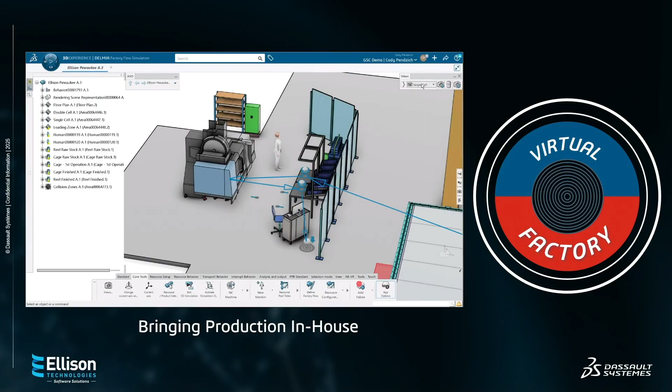Just a simple scenario we'll talk about a lot more, but in this particular scenario, we had a single 3-axis mill that came with this facility. We wanted to add in some additional machining capabilities. Now, in order to add those machines in, what wasn't shown in this is that whole back wall is all office windows into the office space along the corners there.

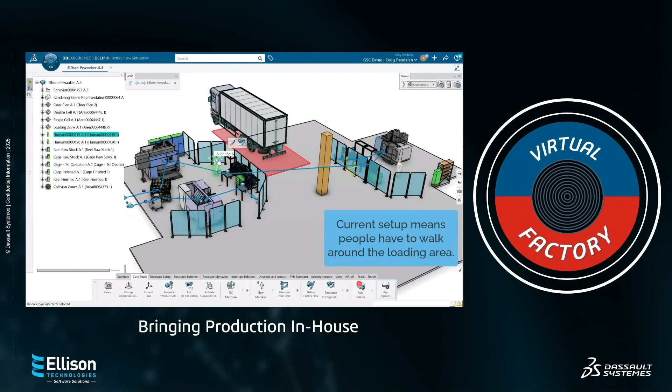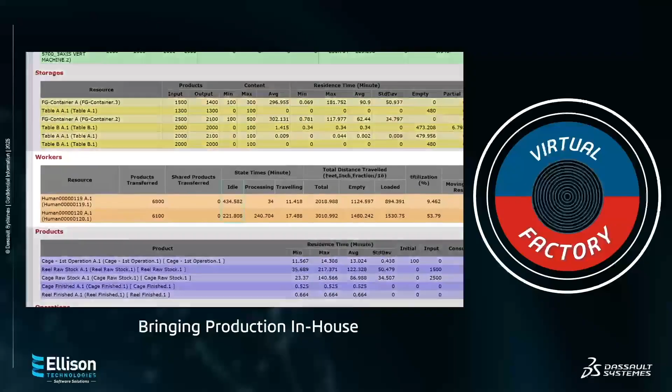So they couldn't put the machines in the corners. The only real place they could do it was on the opposite side. Well, now they have workers split out between 2 cells for a very simple process. And as well as that, what we have going on from there is essentially someone walking through a loading zone over and over again throughout the day — a little bit more of a risk as well.

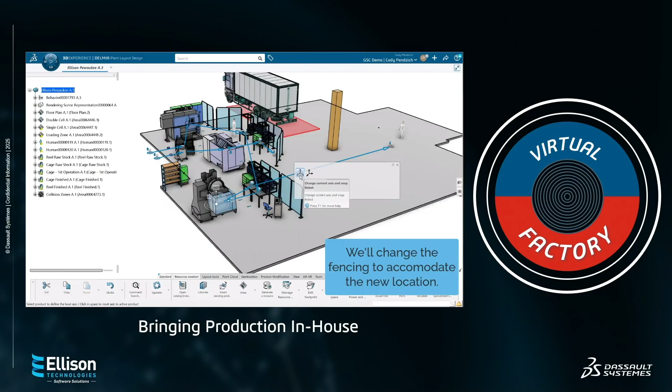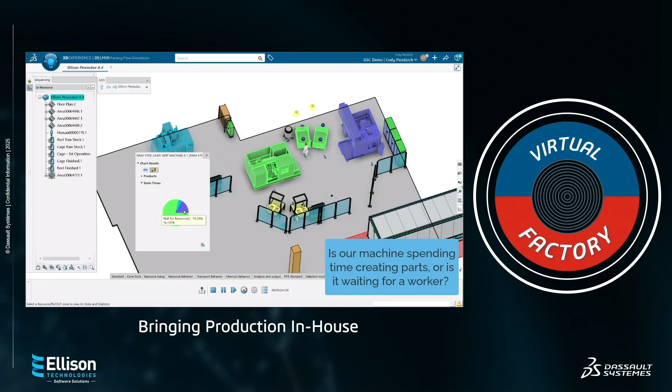Now what they're considering is I can take this facility, I can take this cell, I can move it over to the other side, and then what happens from there? Am I going to be able to stay on top of part production? Are we going to be able to keep that going? Well, I can move a few things around and then we can actually test out the scenario. So I can take it to that next level, and in this case what we decided to do is check if we put all three of those cells together, can we have one operator keep all three machines running and keep parts moving, and then maybe we can reassign that second operator that was working the one machine to something else, or maybe have them move around a little bit more during the day between different cells.

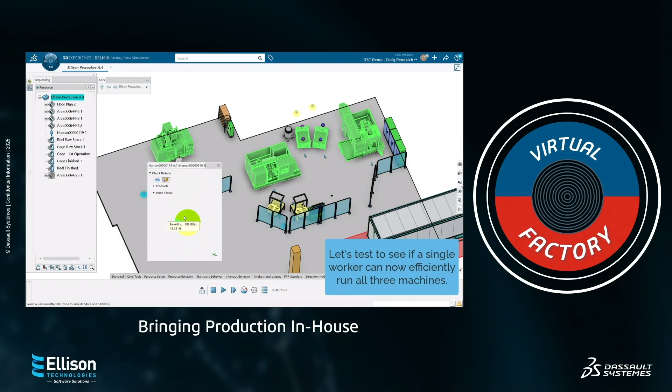As this simulation is running, the system is giving me data and measurements. How long did it take for a part to get from point A to point B? How much time did this machine spend waiting for a part? Potentially a worker to offload a part. All those different factors and variables, and everything's broken out into reports that we can then take and analyze.

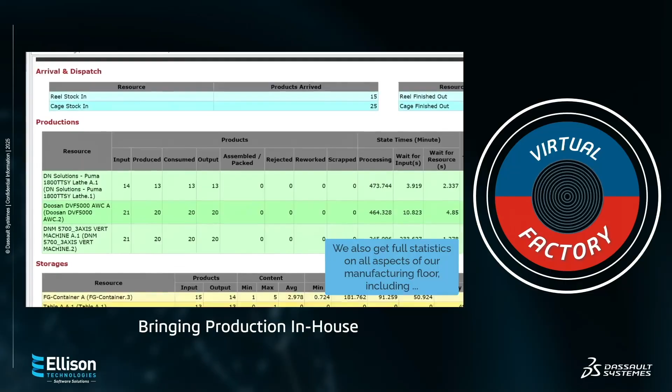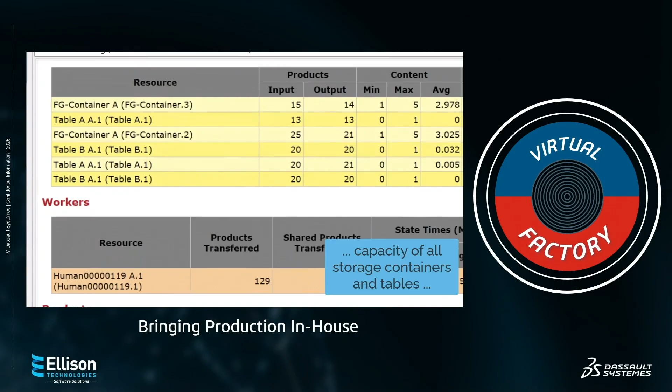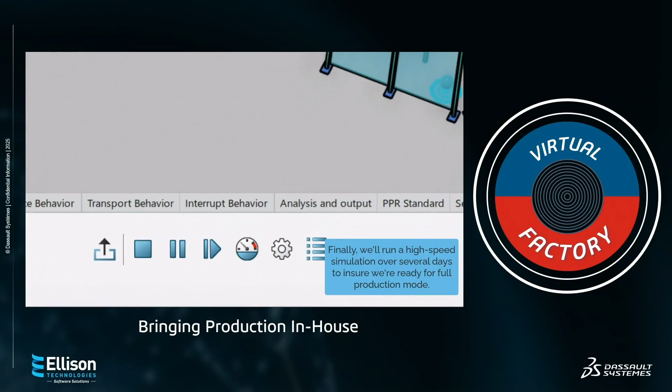That is Virtual Factory. Let's take and test out the scenarios, test out the ideas that we have before we execute. I talk to a lot of companies about their factory layouts and new equipment purchases, all of those types of things.

Ellison is a distributor of DN machines, DN Solutions machines. As a result of that, we get to talk to a lot of companies who are bringing in new equipment, ask them how they're doing it, ask them how it's working today.

And one of the things that I hear really often is that we don't really bring in new equipment all that often. We try to avoid it because it just means we have to go through all of this. Or we'll hear things like, I've been trying to get a new machine like this in for years, but we just can't prove out the value. We can't show that it's actually going to be worth it for us.

So that's where a tool like Virtual Factory comes into play. Now, Virtual Factory is broken out into two pieces. I've spent most of my time talking up here so far about Factory Sim, but the plant layout side of it is very important as well.

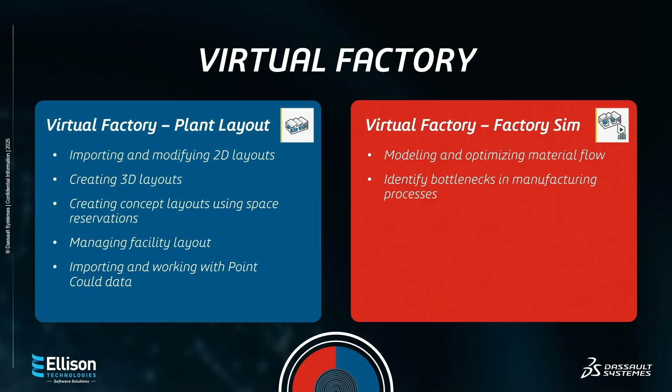So with Virtual Factory, there's kind of two main groupings or main goals that you might use a tool like this for. You might start out with the plant layout where you're essentially taking your data, fitting it into a layout. So this is going to be importing the layouts, creating 3D layouts. And then we have the Factory Sim side of it, which is where you start getting the actual metrics. That's where you add the logic, where you really start to take it to the next level.

Now, SOLIDWORKS does a pretty good job, I think, in some cases of breaking things out into packages that are a little bit easier to talk about. So you have your SOLIDWORKS Standard, Pro, Premium. The same thing is true for SOLIDWORKS Virtual Factory. There's a Standard and there is a Pro. Now, the thing that I'll say is they make it nice and easy. For the most part, Virtual Factory Standard is all of the plant layout capability. Virtual Factory Pro is all of the simulation capability. So if you're looking at where that line might be, that's how you can kind of figure that out.

But let's start by just talking about plant layout. What does the plant layout process look like? Well, first of all, we have to import CAD. And CAD can mean a lot of different things, and it's changing more and more. We're seeing new technologies, or maybe not necessarily new technologies, but old technologies being rejuvenated and used more by solutions like this to tackle challenges.

So then we go ahead and we have to classify the resources. Now this part here is a little bit interesting. I put it in plant layout, but it's really only something you do if you're working on the simulation. It's part of the plant layout tools. You can do it in there, but it's a step you only really need to do during simulation. What this is, we're telling the system this is a robot, this is a machine, and that will help the system understand what types of logic, what types of rules you want to apply to it for that simulation later on.

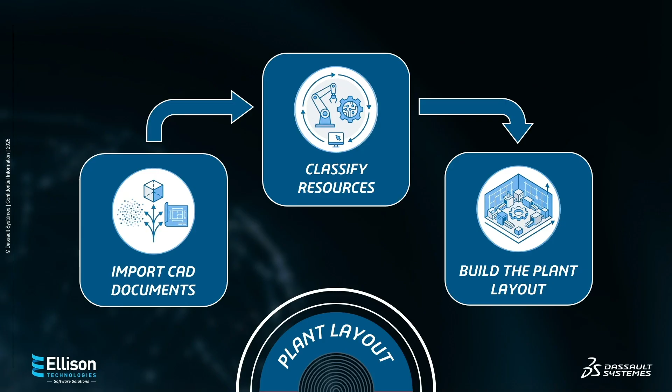And then we build the plant layout. So let's talk a little bit about Factory Sim and what's entailed in that process. Once you go through and you do your plant layout, you can define the flow.

That's essentially, this piece of material is going to start out as a raw block of aluminum. It's then going to go to this station, get loaded into this machine. This machine's going to cut for 12 minutes, and out comes a finished part. Or maybe just a roughing operation on one part that then goes to another station and gets machined further. You could track it through that entire process.

Then we assign the resources. So now we've told it what is a machine, what is a robot, what is this or that. Now we can start assigning workers to different tasks. So we could say this worker is going to carry the parts from point A to point B. And we can actually see those workers walking around during the simulation.

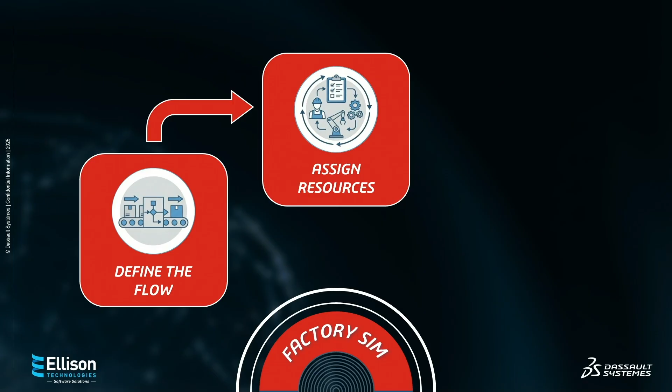And then gathering the data. That's where I would say, as fun as it is to watch, as fun as it is to set these simulations up, this is the fun part and also where all the magic happens. We get to actually see this thing run. We get to see the factory do its thing and just observe.

We used to do this by going out and standing on the shop floor and watching people work, hoping that they weren't just working faster because I'm standing there over their shoulder or whatever else. Now we can track that data without any kind of bias or anything like that.

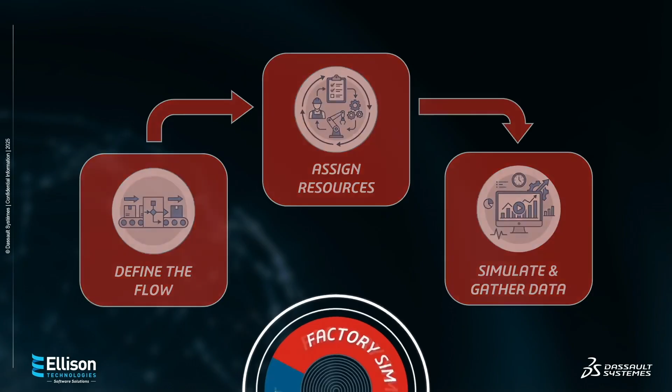So let's start by just kind of taking a look at the plant layout side and setting. We'll go through the actual setup process of a cell.

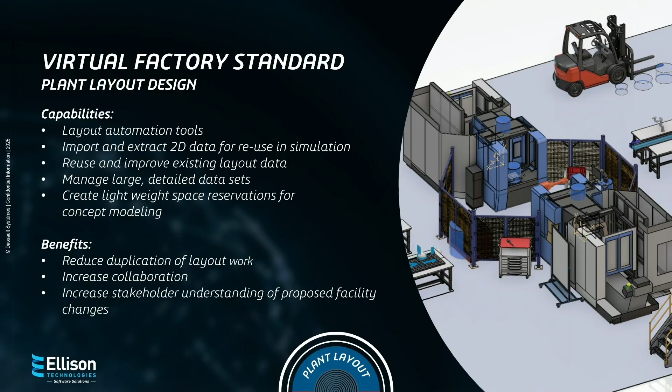All the stuff that you would typically expect to see in a 3D CAD tool for layout is here. We can snap components together, we can move things around. You could take any of your data and manipulate it in that way.

So let's start with the import CAD documents. One of the biggest questions I get when talking to companies about this tool is, how long is it going to take me to get all of our data converted to 3D so I can use it in the system? And that's kind of the beauty of this tool.

SOLIDWORKS Virtual Factory is not a SOLIDWORKS only tool. It can work with 2D CAD, 3D CAD, or point cloud. And I want to make sure it's clear that I said 3D CAD, not 3D SOLIDWORKS. It can work with a variety of CAD files from a variety of systems. So it's agnostic in that way.

And really what that means is you can get whatever data you do have and you can start working with it. I've run simulations without any CAD data. I've had someone send me a Visio flowchart, and I've taken that and turned it into a simulation.

Because essentially what I'm trying to do in many cases is just figure out how long does this task take, then this task, with all the branches and everything else. How do those different steps end up converging later on as the part moves through manufacturing?

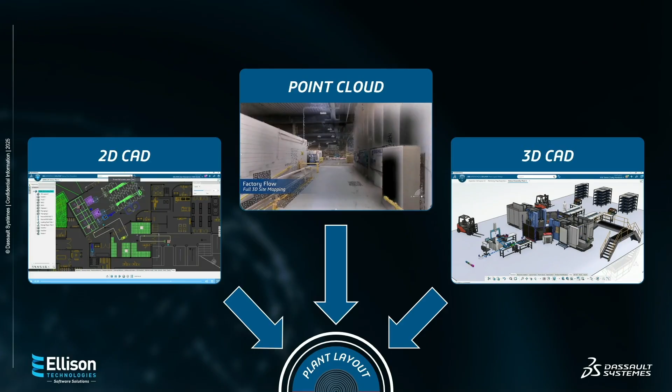What it is, a team will come out with these scanning backpacks, with these long extending scanning arms, and they scan the entire facility, and you get a point cloud, which is essentially just billions of points in 3D space. Really fun to watch how they come in and do all of this and how they scan every inch of the facility.

Now, one of the things I mentioned earlier, the paint shop. Their major issue was an AC unit that wasn't in any of their 2D layouts because it's up there. When they created the 2D layouts, they were looking down. It wasn't something that really came up, wasn't something they thought about.

But that's one of the main reasons people are starting to take an interest in point clouds more and more, is they capture everything. You're gonna see that full verticality of everything. And then as well as that, it's a very detailed version of the model.

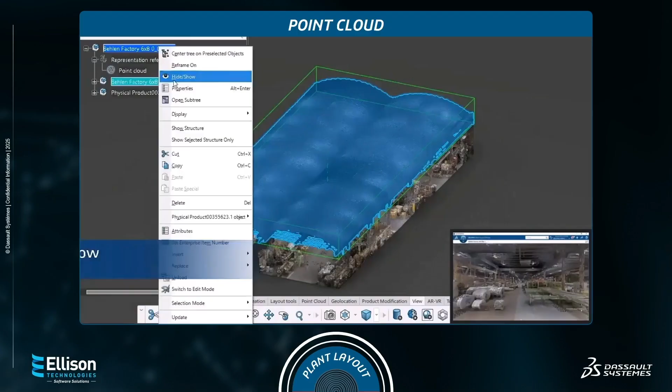So in some cases, the difference between being able to get a piece of equipment where it needs to go without moving a piece of equipment is the clearance that you have below the control system or the control unit on a machine. Things like that can really make a big difference. So this allows you to test all of that out.

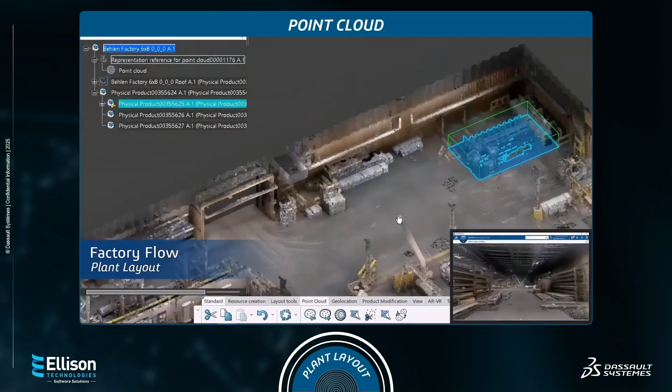Now with point cloud data, it's not like typical CAD where you're just taking and moving bodies around. But what it is, you draw essentially a mesh shape, like a cube or cylinder or whatever, over these points, and you can group them up, and you can even save that out as an asset now. So now that's something you could bring into other layouts and move around.

And then you're able to just kind of move that around and get it exactly where you want it. You can test it within the whole layout.

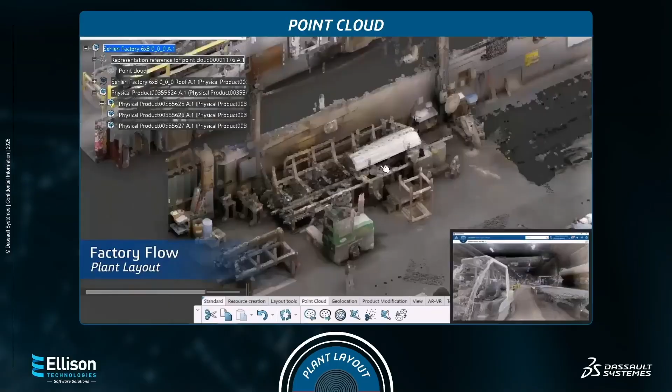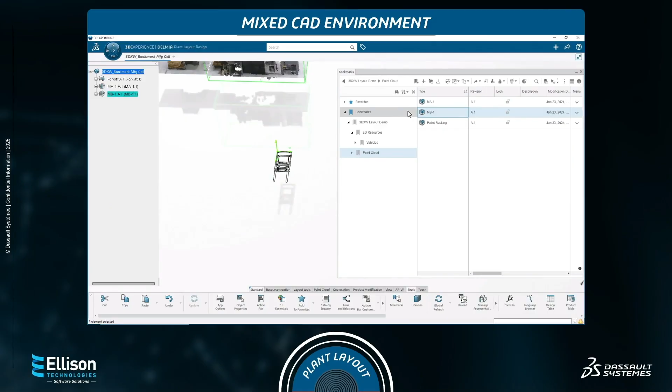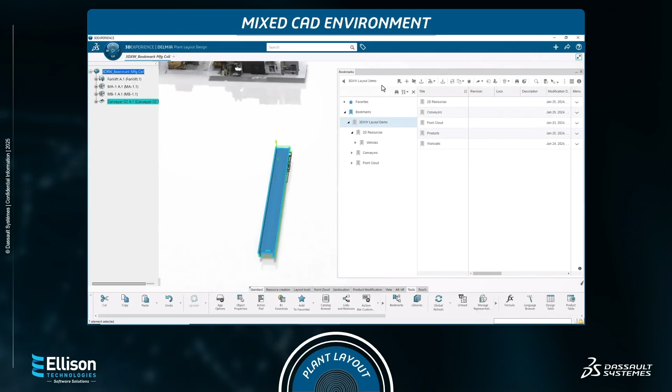One of the things we're asked very often is, what if I don't want to pay to have my entire facility scanned, and I just want to work with maybe a section of it? You can scan a section of your facility and then work in a mixed CAD environment where you're able to bring in 3D data, like this forklift, and then start pulling in other 3D parts, like this conveyor, like this crate, and we can start to visualize all of that working together. So any CAD data I have, whatever I have, I can bring it in and put it together.

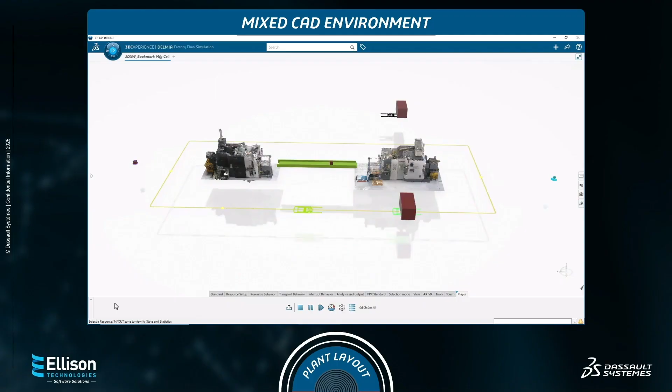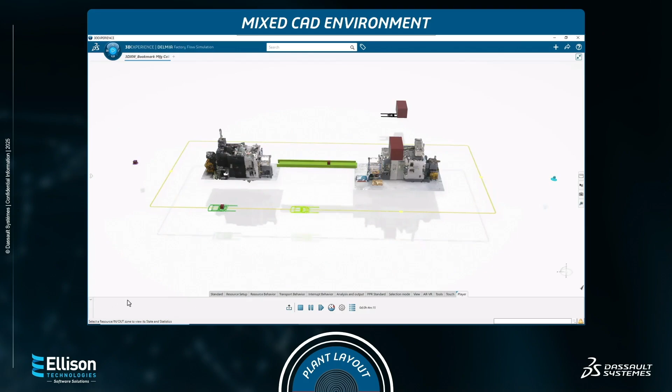I can start to make magic happen and see exactly how the factory is going to work. Now, one of the most important things is if I want to take it further and start doing simulations, I obviously need real times. I need to understand how long does this task take, how are we transporting material from this station to this other station. I have to understand all of those things, but with that information, I can then start to take these layouts that we're building in plant layout and take them further in simulation.

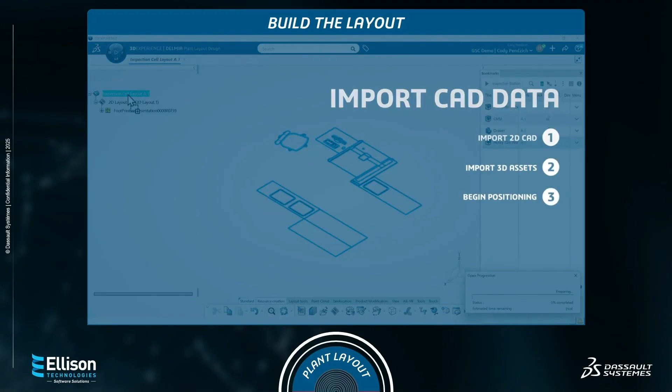In this case, I wanted to show one of the most common workflows people use: they start with the 2D layout and then put whatever 3D assets they have on top of it. So in this case, we're just importing a DXF, DWG file, just a generic 2D CAD file.

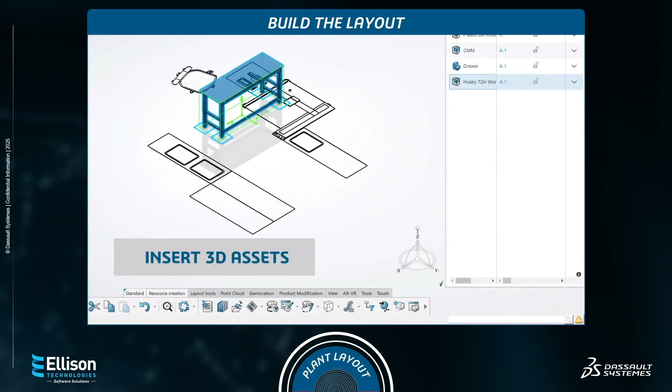Now that I did that, I can bring in whatever models I have. I'm just dragging them from my library and dropping them into space. And then we even have a snap tool that lets me basically pick a point on one item and then a point on the other, and I can snap those together for quick positioning.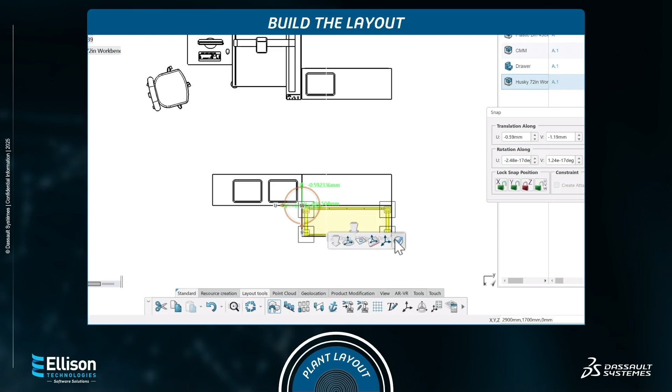So rather than mates, where we might be typically picking faces of a model and tying all of that together, you could just work point to point, simple click and snap. Very quick way to lay out a lot of stuff.

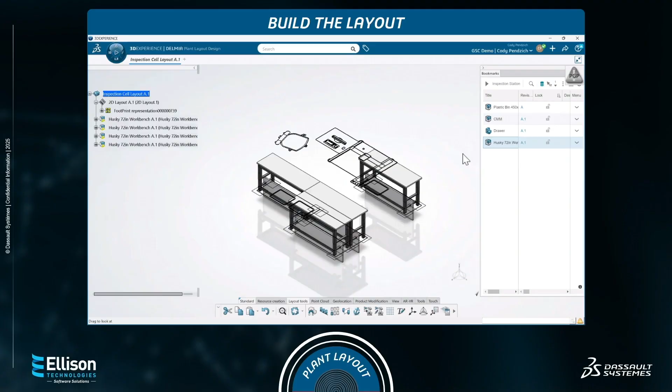Now, as well as that, there's patterning commands. So I used that a little bit to get the other three tables. There's patterning commands, all the type of stuff you would typically expect. And then we just keep adding models, moving things around, organizing it, and getting the exact layout that we need.

And it doesn't necessarily have to stop there. Like I said, if we plan to take this to that factory simulation stage, we could start to identify and classify our resources. We have different resource types that Virtual Factory understands, and each of these controls the logic that we're allowed to use later in our factory flow.

So we can tell it this is a conveyor, this is a robot. A manufacturing product is a piece of material that's going to move through the flow. That might be a raw chunk of aluminum, that might be a finished part, that might be paint, that might be glue, whatever the case is. A manufacturing product is something that is taken in as part of the manufacturing process. And then I can define workers, robots, storage, all of those types of things.

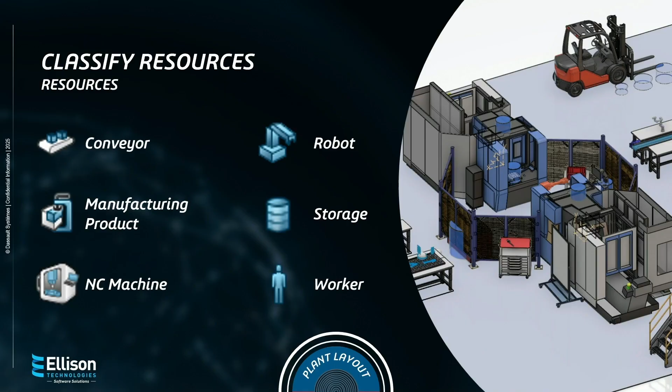So let's just take a look at what that looks like when we have a cell. I've brought in all of my CAD data. The workflow I like to use is I tend to bring in all of my CAD data, and then I add those items essentially as resources or as sub-items of resources. So in this case, I'm creating some basic organization level resources.

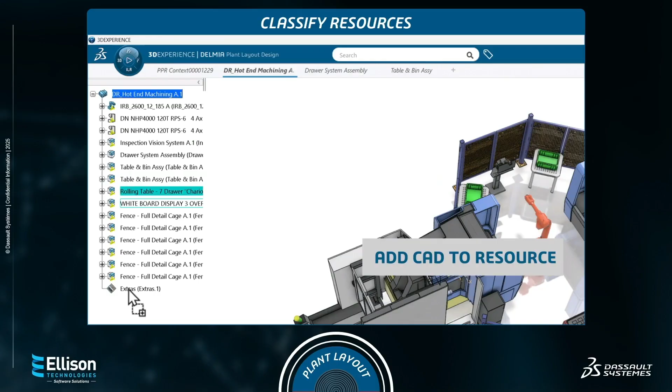An area called extras, that's where I put the fun decorative type stuff that I throw in here to make it look pretty when I show off my proposal. And then I'm going to put in an area called fencing, and I'm just going to drop all the fencing in there so we can create this sub-assembly type structure, just like we're used to inside of something like SOLIDWORKS.

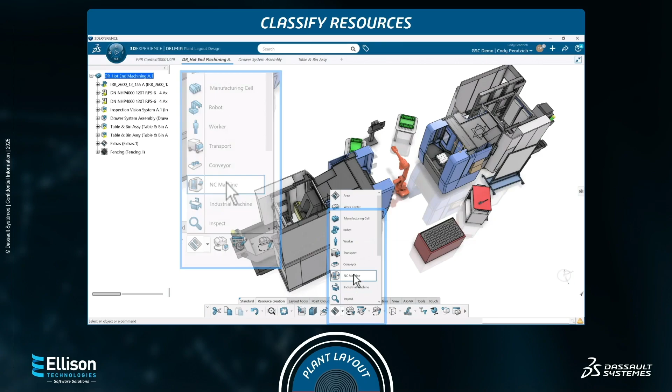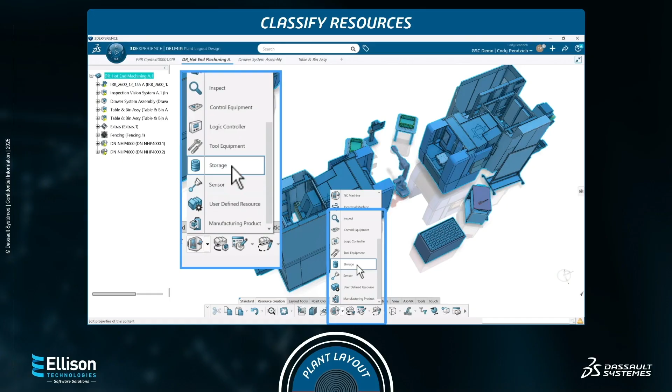Now I can go ahead and start creating the actual important resources, which are the machines and storages. So I can create an NC machine object and just put my CAD underneath that. Something that's kind of cool is when we get into that simulation state later on, the CAD is separate from the resource, which means we're applying the logic for the simulation to that NC machine object, not the CAD. If I decide later, after I've already built out a simulation, we want to try a different piece of equipment, I can swap out that CAD. Or I could set up that entire simulation without the CAD and add the CAD in later. It's very flexible in how it works there.

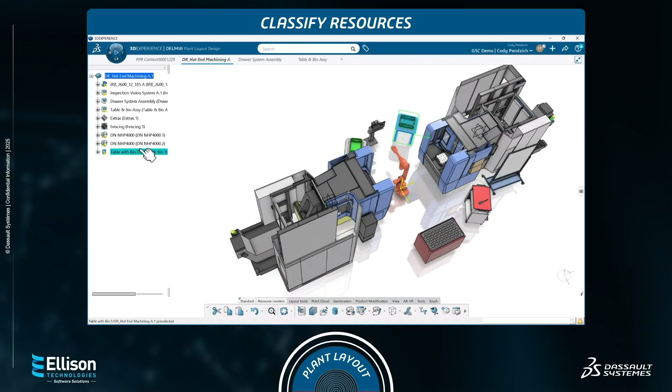Now, something else that's very important to point out: this is why SOLIDWORKS Virtual Factory exists. If you've tried doing factory layouts inside of SOLIDWORKS, you've probably at some time said less than the nicest words to your computer as it starts to slow down and chug along. There's not a lot you can do about that. SOLIDWORKS just has a limit with hardware. The hardware is the limiting factor in a lot of cases today.

So with this here, you're still going to need a powerful computer. I'm not going to tell you that this runs better on the same hardware as SOLIDWORKS, but what it does do is scale really well with hardware. I've been able to run massive plant layouts within this tool. Everything rotates very smoothly, everything zooms very smoothly. Working with this one here, it's smooth. And the DELMIA applications that exist within the 3D Experience platform are built for the same type of data, all built on the technology that we typically see with the higher-end tools like CATIA.

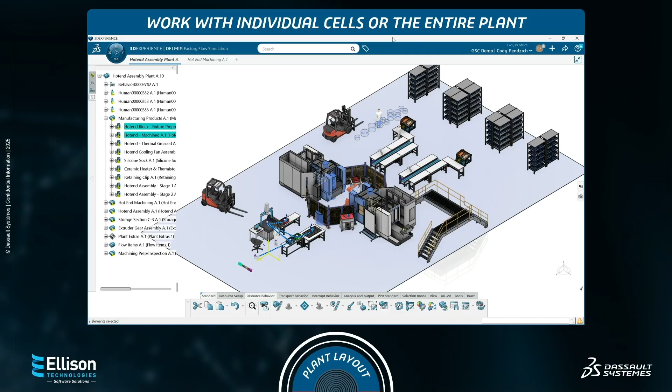Now, the plant layout side of it is pretty intuitive and straightforward, and I think for a lot of people it just kind of clicks. If you've used CAD or SOLIDWORKS before to move things around, the plant layout is kind of exactly what you would expect. But the simulation, in a lot of cases, is a very rapidly emerging process. It's something that's kind of newer. A lot of times when I talk to people, they don't know that you can do this type of simulation. So I like to spend a little more time talking about what this all is, what it looks like, how do you do it.

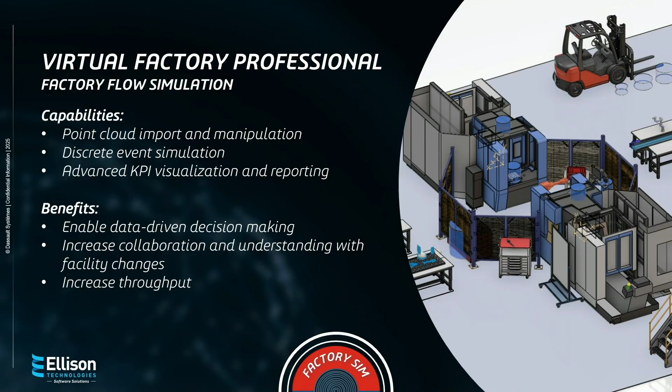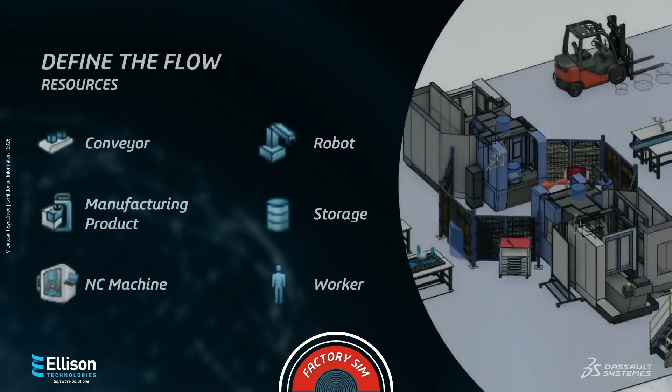So we're going to start out with just defining the flow, the simplest part of the whole process, which essentially means we're going to take those resources that we defined before - conveyors, manufacturing products, machines, workers, storage - and we're going to add activities. These activities are different things that happen out on the shop floor: loaded a part into a machine, unloaded a part out from a machine, transformed a part. We took something in and output something else. That could be, we took in a block of aluminum and output a rough machined part.

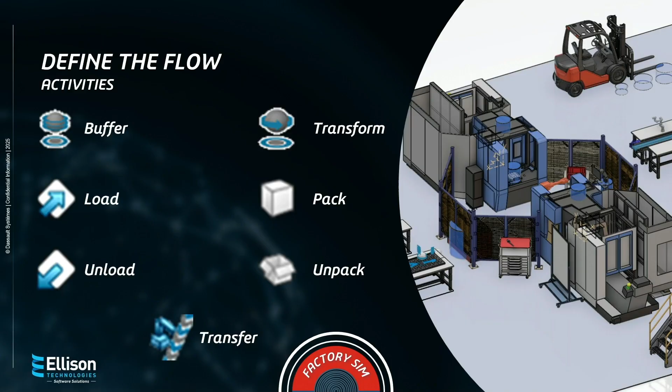So we assign all the behaviors that we want, and SOLIDWORKS Virtual Factory makes this pretty straightforward. There's a define factory flow command, and with that I can essentially start defining my whole process. I also have the capability to, on an individual basis, define equipment. In this particular case I put one of the zones we'll use on that piece of equipment, but I'd rather use the more automated flow for defining everything.

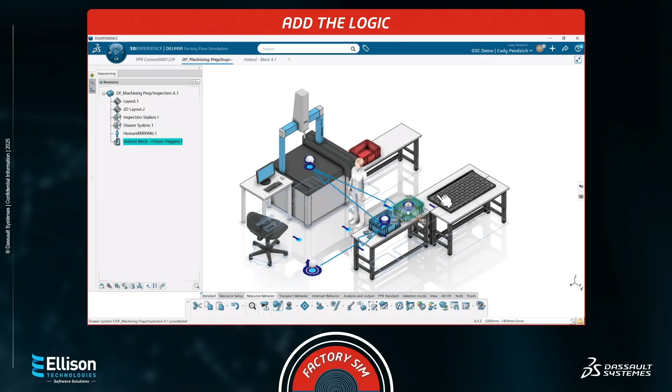So I start by clicking on the ground and creating an in zone - that says products come in here. Then I pick that product and then the bucket, which says parts come in and spawn immediately into this bucket. Then we're going to send them to the inspection machine, then they go to the pass bin, then to the drawer that's going to be fed into the drawer system of the next cell, which I'll represent here as an out zone. Essentially, we're doing a self-contained simulation here where parts come in, go to the incoming bucket, go to inspection, outgoing bucket, drawer, dispatch for the simulation.

Now I can edit the parameters of the task, so things like duration or giving the task a name.

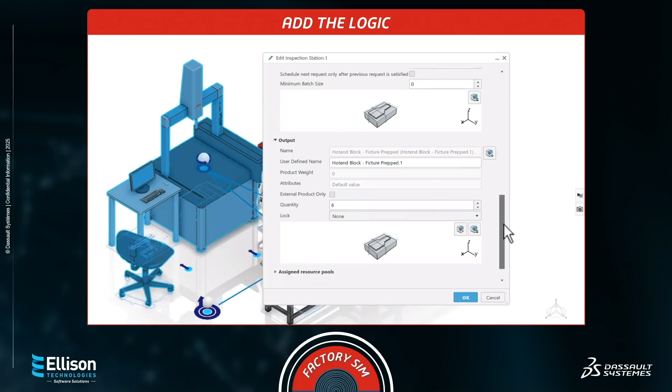Inspect fixture positioning. I'm going to go ahead and put in a duration of 32.3 seconds using our metrics and things that we've collected from shop time studies. And then I can also specify that this is actually a 6-part process. We take 6 in, load them up, run the inspection, take all 6 off, and unload. So I can specify that, click OK, and now effectively at this point I have set all of the logic for this simulation.

But there's a few extra pieces we might want to take advantage of. What about scrap? We're doing an inspection process here, so there are going to be parts that fail. Well, we have a scrap bin. I added a new flow pattern that goes to that, and I can have scrap parts moving through that and then dispatching from the manufacturing flow.

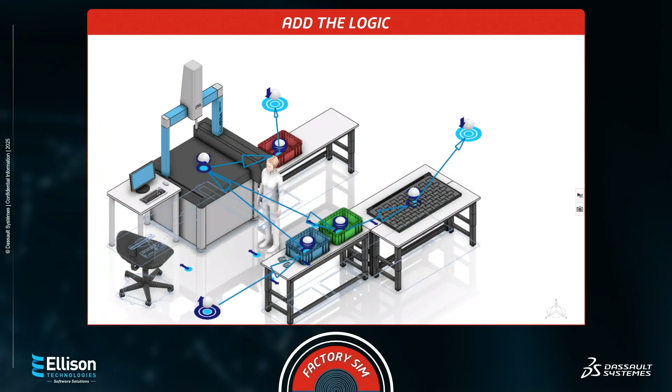So we're saying, is this particular path or this particular arrow taking good parts or taking bad parts? I'm able to route parts based on that. This means that you can do rework, or you can do scrap dispatch from the simulation, and get an exact idea of, over the course of a shift, how many parts we're losing. Now it's all based on essentially an inspection pass-fail rate, so you'd have to have those numbers from quality for that.

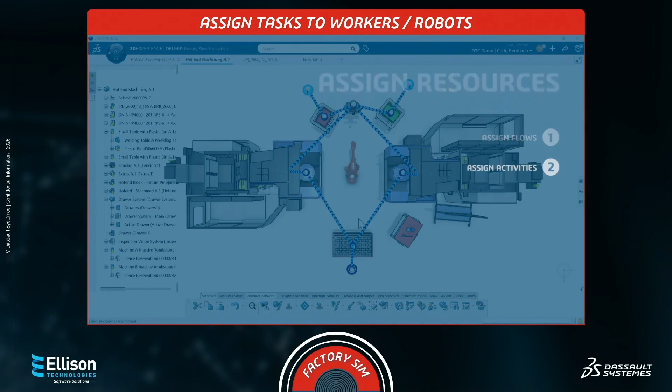So let me get into assigning the resources. When it comes time to assign the resources and get this going, basically from here, this is where we tell workers or robots in this particular case what tasks they're doing. So I'm saying that my worker is going to go ahead and move parts from the drawer system to the machines.

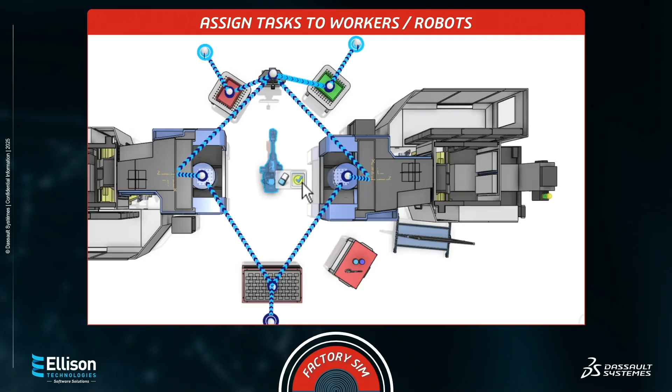And then there's actually going to be a multi-pallet system here, so while the robot is feeding one machine, and while the machine is machining, the robot is going to be loading the other side. So we're able to kind of keep that simultaneous action going, and we can ensure that the robot is always running. We're going to be able to see metrics at the end as to how much time the robot is spending idle.

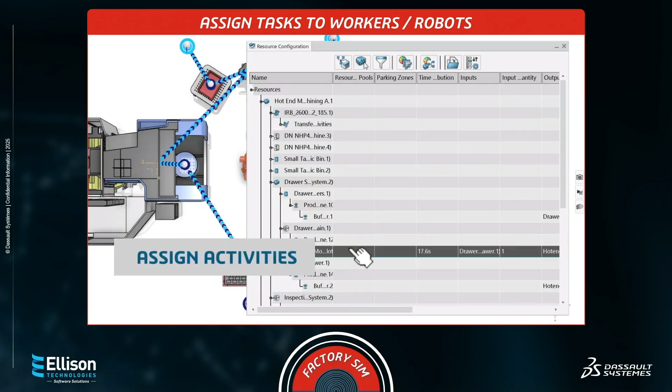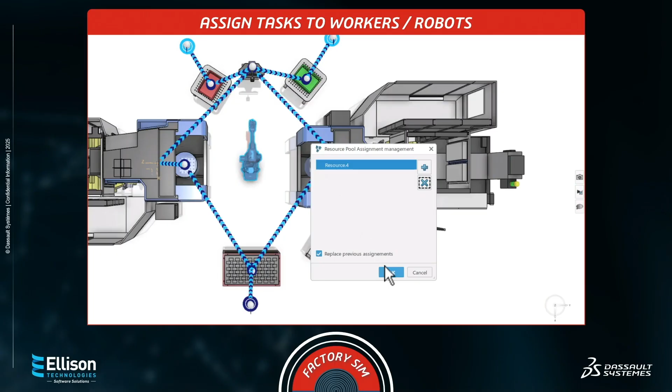So now, just taking a look at a couple final items, we want to make sure that we have a robot assigned to some of the activities, like the drawer system changeover. The robot is going to be essentially tied down every time we burn through, I think it was 64 parts in this particular one, looks like a little bit more. But essentially, every so often, the robot is going to be stuck for about 29 seconds as it does that drawer changeover.

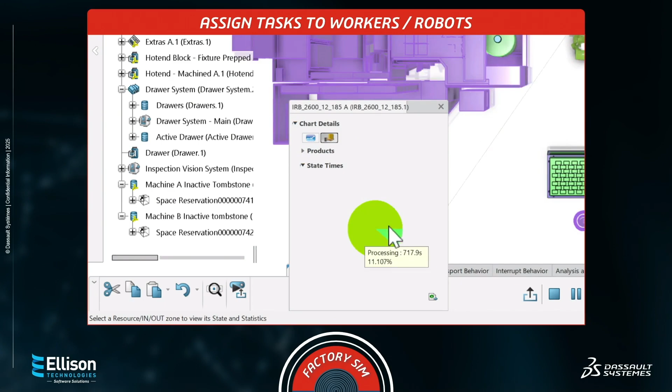So what does that mean? Our machine's going to be sitting idle when that happens. And now I can run this, and over time I can see exactly whether or not that machine is ever idle by looking at its processing output versus waiting for output, waiting for input, and different things like that.

So we're getting, what I like to say is, data that matters. We're seeing how the production flow actually shapes out. We can put numbers to it, and we can then help our executives make better decisions around equipment purchases and that type of thing. This is our way to essentially eliminate some of the

Joe thinks this, Jay thinks that, you see on the shop floor, where someone has an idea for where to put a piece of equipment, someone else disagrees, has a different idea. Well, now you can test those ideas out ahead of time. You could see which idea is actually better, and then you can make those educated decisions.

And I pointed out earlier that what I see a lot as I'm talking to companies is they're not making changes to production very often, which makes sense, right? You don't want to make changes to what is already working if you don't know that what you're going to do is better. This is a way to fix that. This is how you could start to see if this new equipment purchase is actually going to provide that return on our initial investment.

So let's circle back here and actually watch the simulation run. This is where it starts to feel a little bit like a video game. You get to watch the worker run around, feel like I'm playing The Sims, and I get to see parts move through the simulation.

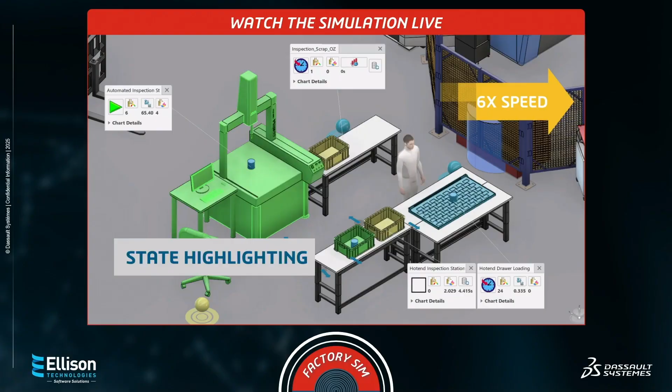I can see that there is consistently 6 parts on this inspection station. There's not a lot of idle time there. And if I wanted to, at any time, I can expand out any of the sections here to see these

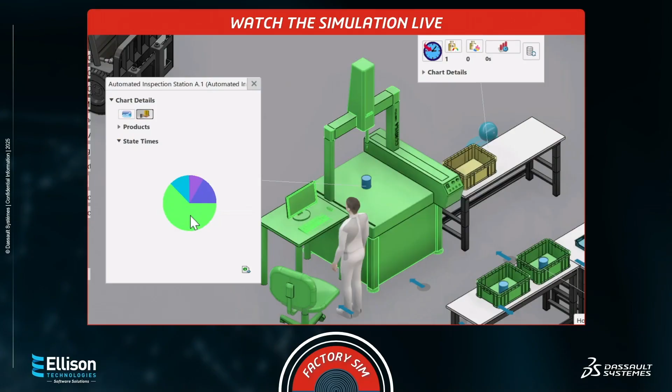charts with additional information. So I can see that this is spending a fair amount of time waiting for input, a fair amount of time where there's no parts ready to come in, and it's also spending a fair amount of time waiting for output.

So waiting for a resource, which means the worker is busy doing something else while the machine is done inspecting the parts. I can keep track of all of that at a very granular level every step of the way, and you can also track things like your fail rates, how many parts have gone out of the simulation for failures, and different things like that.

This allows us to essentially take takt time and get real metrics relative to that takt time.

You set up a scenario, you set up the logic, you could set up shift schedules. You can get really intense with it, really granular, and you can even introduce randomization so that you can run the same simulation under different circumstances 50 different times and understand the full range of data.

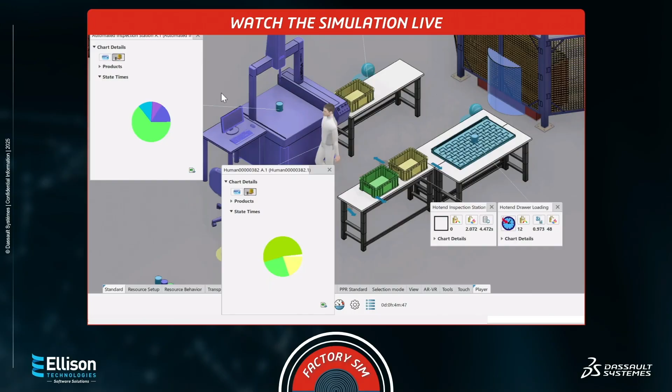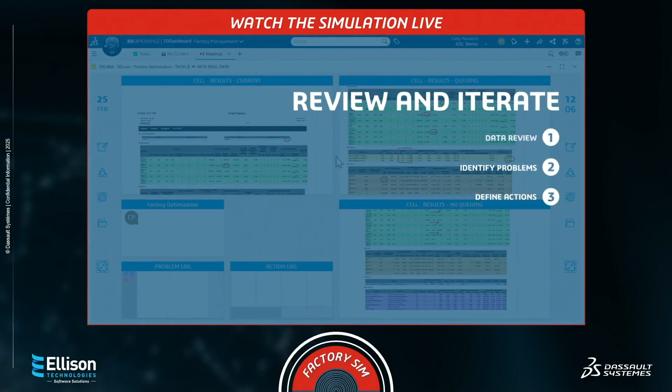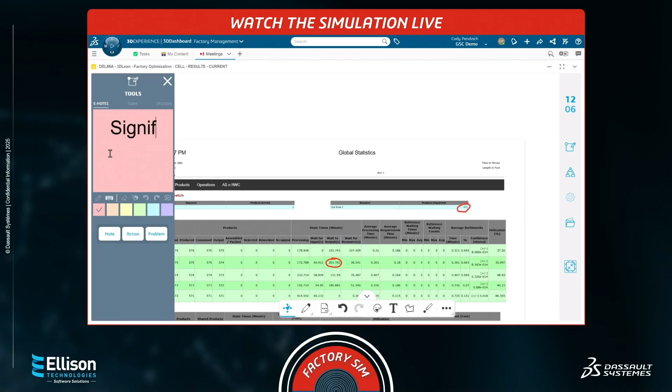Once that simulation runs, we get all of our data in a report, and I can open up that report. In this case, I'm viewing it inside of Lean Team Player, which is like a smart whiteboard kind of thing. Really good for this type of document review because it allows you to mark up the stuff that matters, mark up the specific problems, and you can quickly take stuff and turn it into actual actionable tasks.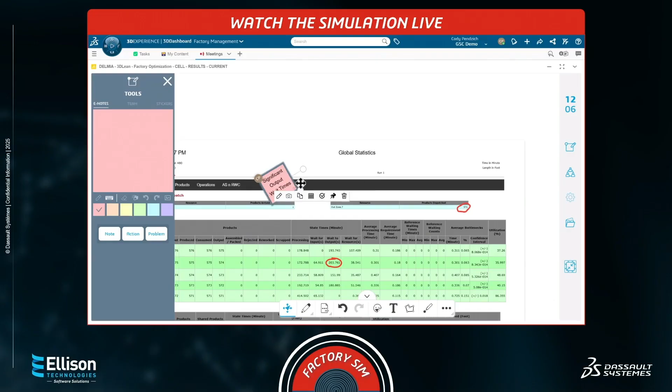This ties in with the platform's task management system, so these items that I'm creating here actually will generate tasks for the assigned people. So it can be kind of nice for that.

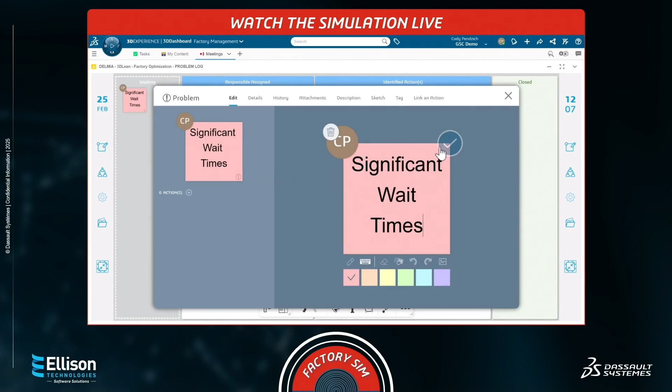In this case here, I'm looking at a few different things. We have high idle times on some of the machines, and we're starting to see some things really ballooning out. So we had a note here that one of the machines was waiting a lot. It was constantly waiting for a resource.

So I can go ahead and define actions and things like that that we could potentially take. So one of the things we're considering is offloading fixture prep to station 3.

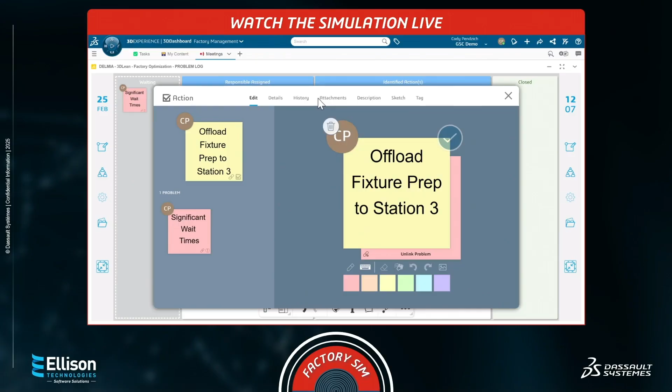And I can go ahead and create that as an action, and I can assign it to someone, in this case myself, and it's going to create a task in my task system for me. And I can continue to do that for all of the other results.

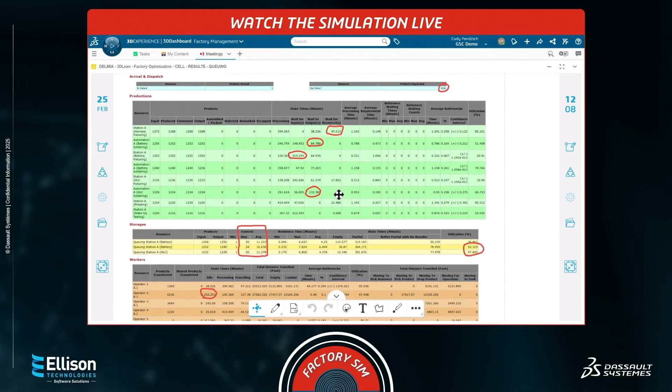Now, a couple things I just want to point out. There's so much information here on the screen. I'll point out the ones that I tend to find people are using the most.

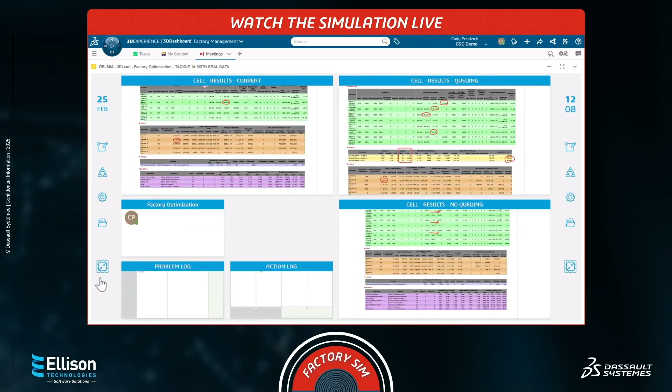Of course, you could see all of your cycle times, the averages there. Another one that I've seen some people find particularly interesting is you can see the total distance traveled by a worker over the course of a shift.

Am I making this person run 50,000 steps in a day where they're probably going to be a little bit tired, maybe not as fast anymore? Or is it manageable? I could see the idle time that everybody has, so I can start to understand how much time in a day does this person have. Am I expecting them to go at full speed 100% all day long? No breaks? You could start to test those things out and really understand exactly what you have.

As well as that, while the system is entirely no code, which I think is something very important to mention, you can set all of this up without writing any code. A lot of times when you want to do this type of simulation, you have to start writing code in order to do it. The system is entirely no code, but it does have the flexibility where you could start writing custom code to go even further.

We've seen that done in a couple cases for scenarios like onboarding a new employee. I can set it so that the employee takes 60 seconds to do this task, but after 1,000 runs, they take 55 seconds, and after 10,000 runs, maybe they're down to 40 seconds. So I could apply logic like that and test out scenarios, even the rollout of a new cell over the course of 6 months.

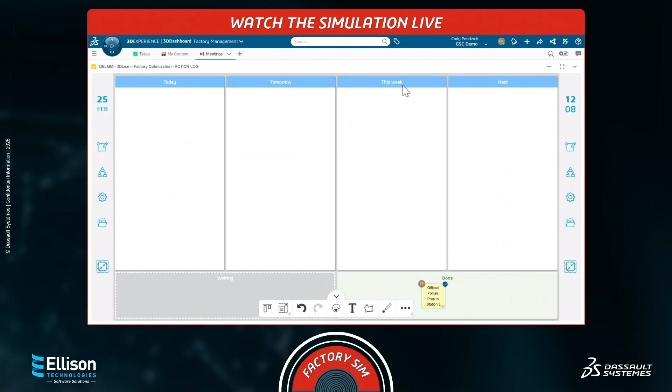So just to summarize what Virtual Factory is, that's really the whole goal here. If you've heard the term Virtual Factory but don't really know what that means, we've seen that it's split into two pieces: the plant layout, which matches up with Virtual Factory Standard, and the simulation side, which matches up with Virtual Factory Professional.

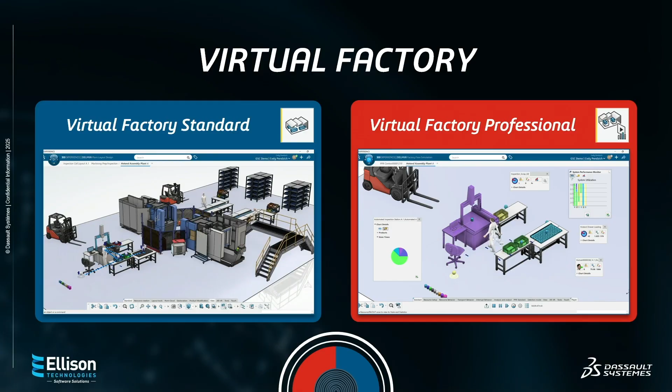I'll share one more quick story that I think is an example of where this really comes into play and where it proves to be, in my opinion, most beneficial. We had a project with a client. They had two pretty major projects going on: they wanted to revamp one of their robotic cells, and they wanted to revamp one of their machining cells.

On their machining cell, it was a robot-tended machining cell. They were going to significantly reduce the cycle time. They had changed the way they were machining the parts and doing some things, so they were going to significantly reduce the machining time. They were worried that once they did that, the robot would no longer be able to keep up.

They knew how fast they could test out the fastest scenario in their robot programming tool, essentially figuring out how fast the robot could possibly go. So we had the fastest case numbers, put those in, and ran simulations. Ultimately, in that particular case, we weren't even close to falling behind. The robot was great. But they already had quotes in for a bigger robot because they just weren't sure.

They had no idea, and it's a really hard thing to figure out. The drawer changeover was really the main thing throwing off their numbers, making it hard to tell - with that robot sitting idle every 29 seconds, was it going to start to fall behind? That was the main thing. So they were essentially about to make a very large purchase on a guess. We were able to put numbers to that.

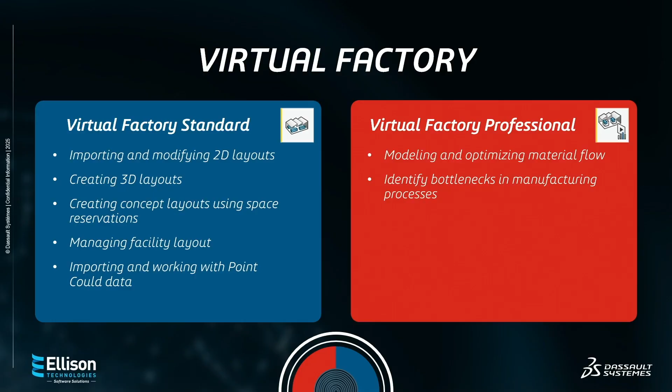And you can ask the questions that are important and test out those scenarios. You can also set up 10 to 15 different scenarios, add them to a queue, and just hit run. It will run all 15 scenarios. You walk away for a little bit, grab some coffee, come back, and you've got your numbers to sit down and look over.

So the whole idea with Virtual Factory is really, we want to be able to make educated decisions about our operations. In a lot of cases with CAD, it's a little bit simpler than that, there's a little bit more room to experiment. But when we're moving massive machines and things like that, there's just not that level of flexibility. So this tool allows us to get the data that matters and make decisions that will actually have an impact. That's kind of the idea.

And that's really what I have here to talk about today, but I'm here to answer any questions you might have. I'm happy to talk about other projects we've done with clients, or projects you're thinking about where you're wondering if this could help out. So I'll be hanging around in the room and answer some questions you guys have.

Is there something integrated on this tool to make an AR or VR analysis to put the customer in the field?

Yes, so there is an AR and a VR module. I don't have all the specifics on it, but I can get them for you. I know some of the AR VR tools are available in this version, but I don't know to what extent. You might be able to get just so far, and then there's other tools that are more focused on the AR stuff. But I'll circle back, if you wanted to stop up here, I can get your contact info and send you what I find out. But that's for the more VR side.